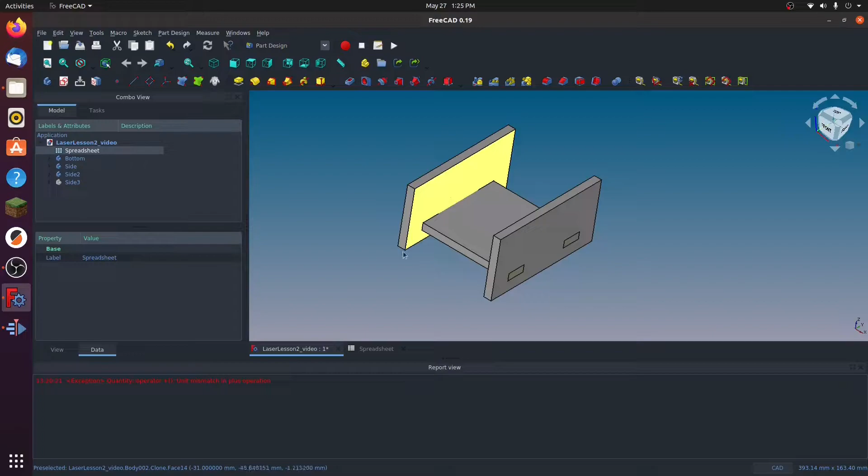I'm going to go in the opposite direction, quite thin. I'm going to be using a thin balsa because I want to cut this out on the Ortur diode-based laser, which is awesome for surface etching. It doesn't quite have the cutting power that, say, the Omni CO2 one does, but our model here isn't going to mind. Let's just make this 1.5mm. There we go. And when we come back, we can see that it is in fact working here.

Before we go too far, I want to point out this little navigation cube we've got off to the right here. We haven't been making a ton of use of that, but it's a good time to familiarize ourselves. You've probably been using control right-click to pan like this, shift right-click to rotate around like this, which is great for freehand work. But you'll notice that right up here on the navigation cube, if you click, it's going to give us a very precise view inside of our viewport. You can also click the corners, and that brings us back to our regular view. You've also got a drop down here that allows you to change between your views like orthographic, perspective, isometric, and so forth. Keep that in mind because in a moment we're going to be bouncing into another workbench.

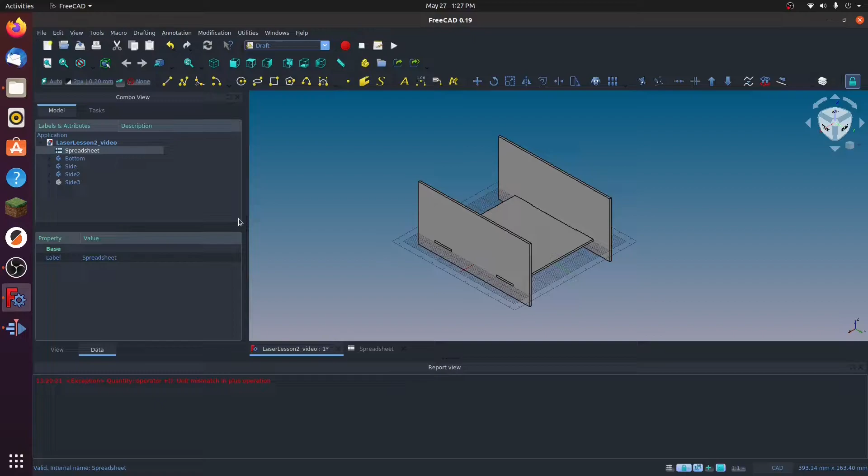We immediately see this grid on the XY plane here, and that should serve as a visual reminder of what is going to happen. The Draft Workbench is completely about working with 2D shapes. That's important because the laser is going to accept basically a 2D format. We're going to take this 3D model we've created and transform it into 2D shapes that are acceptable for use with the laser. There's a couple formats we could use: SVG is acceptable, DXF is acceptable, and you'll see as we go along that we've got quite a wide variety of options we can export to using FreeCAD.

The specific tool that we're going to be using is found under Modification, right at the bottom here, and it's called the Shape 2D View. This is the one that we are going to be using.

Now, I'm going to go ahead and use it right now, but you will see right away. I want to illustrate this because this can be very confusing when you first start working in the Draft Workbench. So I want to take my 3D model, hold Shift, and highlight all the parts that I want, and go to Modification, Shape 2D View, just like this. And a very confusing thing is going to happen.

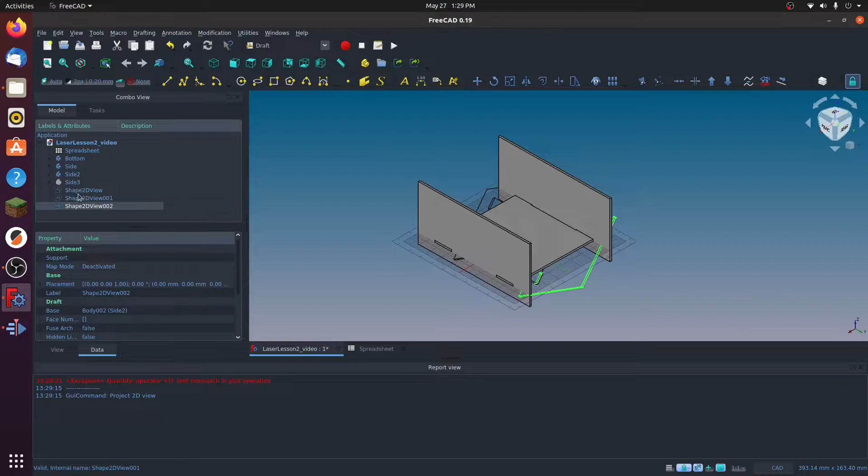You can kind of see right now that the look I've achieved is kind of strange. First off, you'll see that a Shape 2D View was created for each of the parts, and I do want that. But if I start hiding the 3D versions of these parts, you're going to see that what it's done is basically create something that would be quite unusable with the laser.

Now, the very important thing to remember about the Draft Workbench's 2D shape feature is that it will always project what is in the viewport to the XY plane. So you have to make sure that you position your model in a way that you will get the projection that you want for producing your vector.

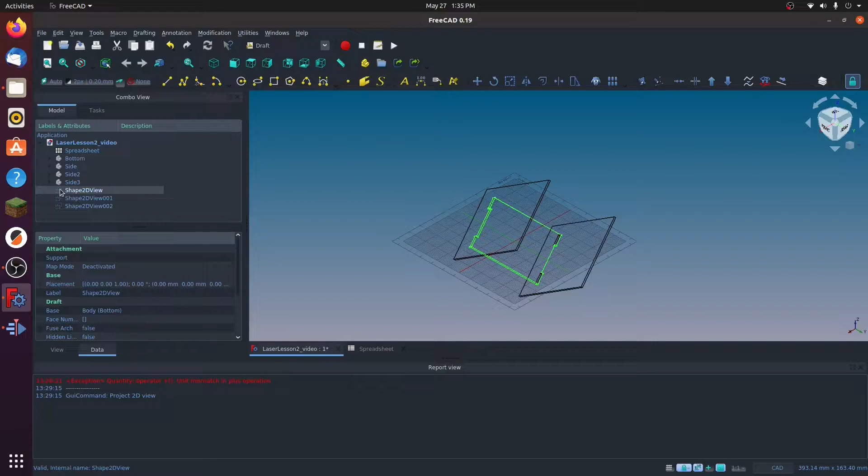Let's fix this up. We're going to make use of that viewport navigation cube, that's going to be quite handy now. So first thing I would like to do is let's get rid of this vector view that we don't want. So we're just going to delete that.

We're going to bring back the visibility of our 3 parts, and let's say this time we go one by one. So I've got the bottom part highlighted right here. And in order to project the vector that I want onto the XY plane, which view should I be looking at? Now, I could try and get it just by panning and possibly rotating around, but no matter how careful I am, I'm never going to get it just right.

So instead, we'll use our navigation cube. I'm going to click on the top, which gives us this kind of bird's eye view of the bottom piece of my assembly. If you want to confirm that for yourself, you can actually hide the 2 pieces that we're not working with right now, and re-highlight the bottom.

We'll go back to Modification, and now when we click the Shape 2D View, it'll look like not much has happened, but you can actually see there's a kind of a dark edge around here. And if we hide the bottom piece, there is an exact 2D duplicate of our 3D part.

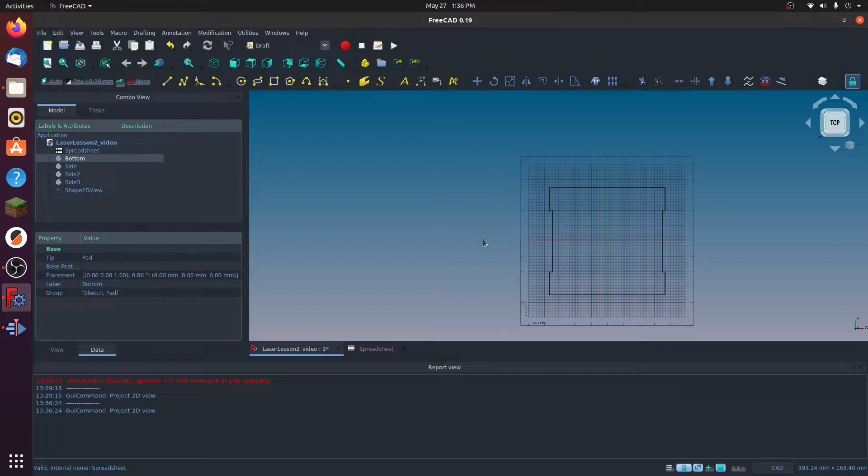It's pretty good, right? Now you can still use all of your usual navigation stuff, so I can still rotate around like this, and I can rename the Shape 2D View. Let's do that, because if you're working with quite a few parts, it could get confusing. I'll rename it, and I'm going to call it Bottom Shape 2D. There we go.

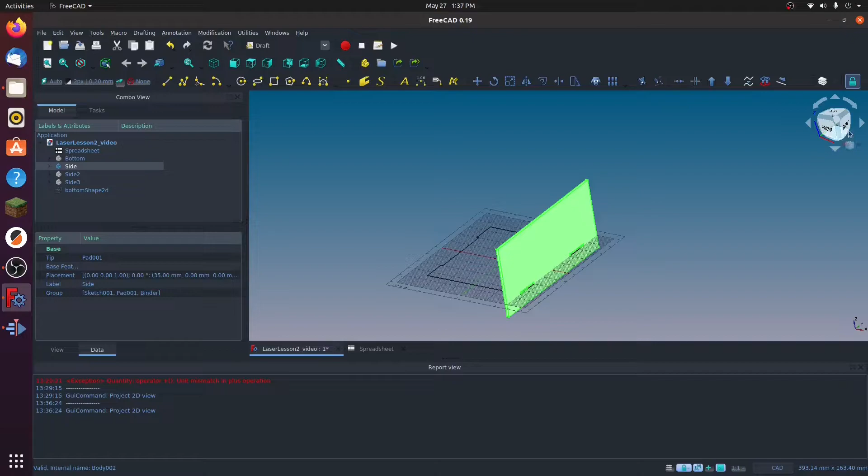And let's do another one. Let's bring back one of our sides here. There it is. And now you can imagine that if you click on the right-hand view, once again, we're going to be perfectly aligned to get the vector that we need. The bottom piece is maybe the simplest one because we're just projecting it onto the XY plane and it's already on the XY plane.

The important thing to notice here is that we're going to project this onto the XY plane, and it's basically going to rotate it 90 degrees. Let's do it. We're going to go Modification, Shape 2D View. And now let's hide that side piece, and it looks like it's disappeared, right?

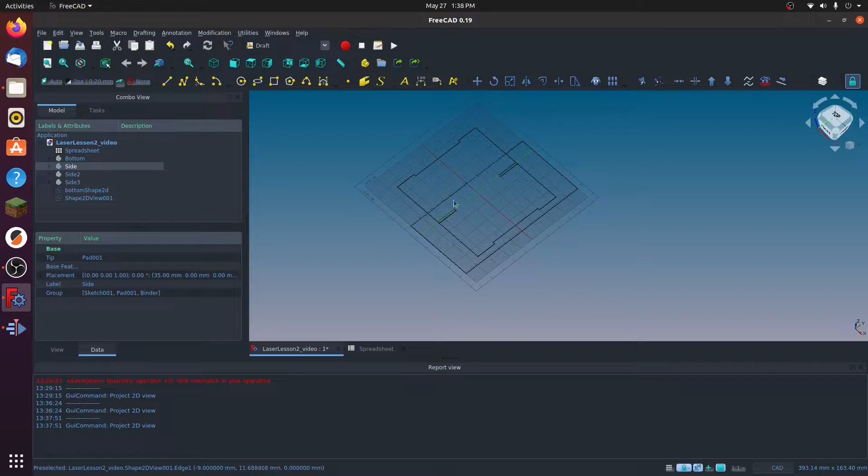But if we go back to our view from above, you can see that our side piece is in fact there. Now, it's projected it onto the XY plane and it's overlapping our other piece. But if you highlight them one by one, you can see that they are in fact 2 completely separate vectors.

If you find this view a bit odd, having them overlapping doesn't really affect our final output, because we're going to export these shapes into another format for use in our laser software.

But if you find it confusing to look at like this, there's nothing stopping you from highlighting one of them. I'm going to rename it first of all. So I'll call this my side shape 2D. There's nothing stopping me from taking my side here, going down to the placement property, looking for the position, and we can move it.

And once again, you can see our little navigation cube becomes helpful because we can see that the X direction is basically how we are aligned here. It also matches the red line that we see in the middle of the grid. And if we start increasing the X direction, we can move that on over. As I say, we don't have to, but visually it can be helpful working this way. All right, so that looks pretty good.

And if we bring back our 3D model real quick here, we can see that we don't necessarily have to convert our other side into a shape 2D view, simply because it's the exact same as the one that we've created. So if we want to save ourselves a little step, we can just export directly the two pieces that we have here and then duplicate it in the laser software that we're going to be using.

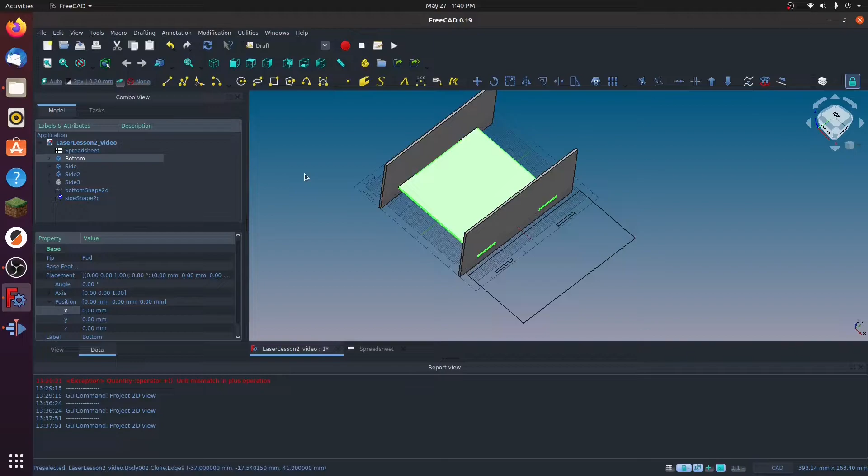So let's do that. I'm going to re-hide these. There we go. It's important that you highlight by holding Shift all the pieces that you want to export. And then you can simply go to File, Export, and you're going to have a ton of options inside of here. If you click the files of type, you can see I've already selected DXF, which is a very simple 2D format. But if you click that drop down, there are tons of options here.

I'm using the Autodesk DXF 2D, but you could also, for example, use an SVG type of format. But let's go with the DXF. It's a very universal format. I think that's okay. And I'm going to give it the name that I want. I'm going to call this my tab slot assembly, just like this. And I'll save it into my documents, just like that.

And that's all we need to do. We'll have perfect vectors of our model, and we'll be able to bring them into other software, principally the laser control software. Okay, we're now moving over into the laser control software. Here in the TTL Makerspace, we make a lot of use of a tool called Lightburn because it can be used for controlling lasers from this Ortur Laser Master that we're looking at here, all the way up to the more powerful Omni CO2 based laser.

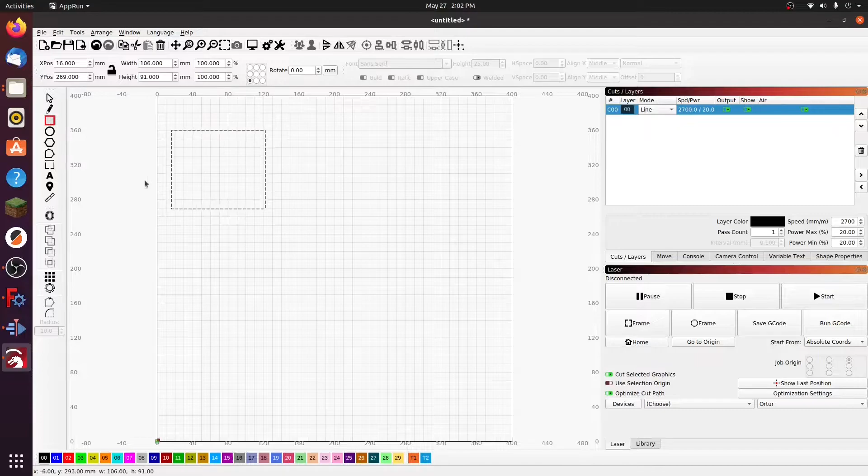Just to illustrate really quickly, I can draw a shape here, then I can select that shape, I can move it, I can scale it, and so forth. We won't be making use of the drawing tools in this video because we've created our design using FreeCAD. But I just wanted to point out that when I draw this shape, it is automatically informing the laser control software that we find over to the right here, where we see cuts and layers.

Along the bottom of these tabs, you can see that I have options for moving, and this is actually for moving the laser head. I've got a console, and I can type in commands and send them directly, manually, to the laser from here. I can even create macros of commands to do sequences of things with the laser, such as moving it, and then maybe starting up its pilot to show where the laser head is positioned, things like that.

There's a camera control tab, which has to do with if you have a camera attached to your laser. That's a fun thing we could look at. Variable text has to do with if you want to, let's say, output a series of serial numbers.

You're doing, like, product marking or something like that, and you want the SKU numbers to be incremented and output automatically. Variable text lets you do things like that if you need to make, say, 1,000 SKU numbers. This is all part of laser control. We're primarily going to be looking at the cuts and layers options down here.

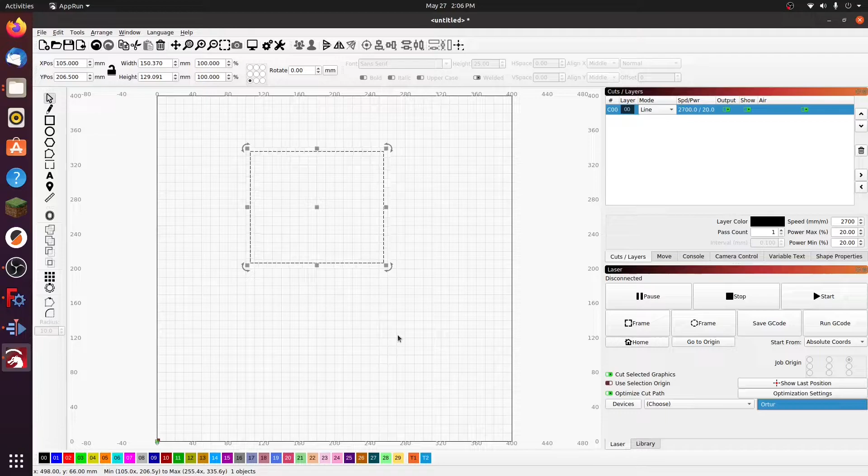You would also see this little point right here, which is the home location. On the Ortur Laser Master it is in the bottom left, but on the Omni it would be in the top right, and it will remember things like that, and basically lay out the bed for us with dimensions specific to the laser that we want to work on. Now, this is a very quick overview because this is not an in-depth tutorial on using Lightburn, but we can definitely do more videos on that.

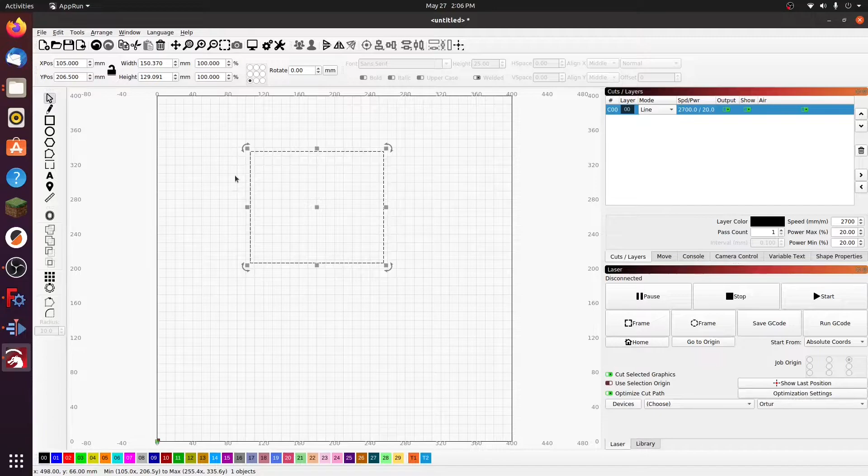For now, what I want to show you is how we bring our design that we created in Freecad and output as a DXF into Lightburn and lay it out for creating on the laser. So first off, let me get rid of this little square that I've created. And I'm going to go up to File. I am going to say Import. I'll go to my Documents. And I need to bring in the file that I created, which is the tab slot assembly DXF.

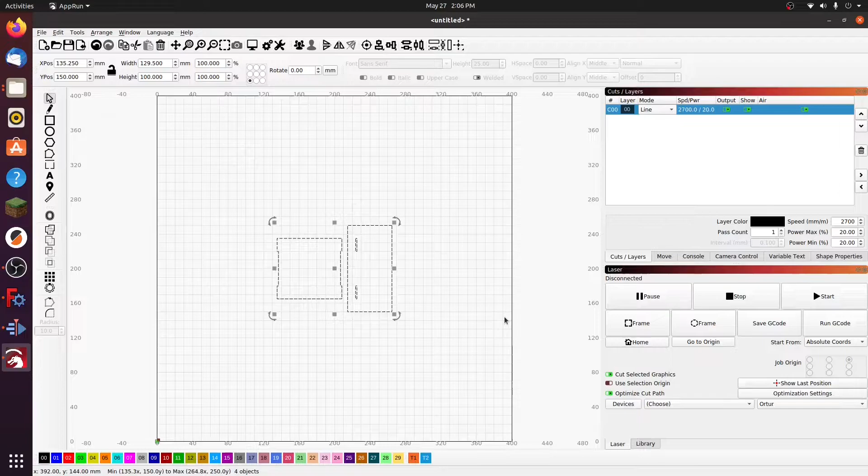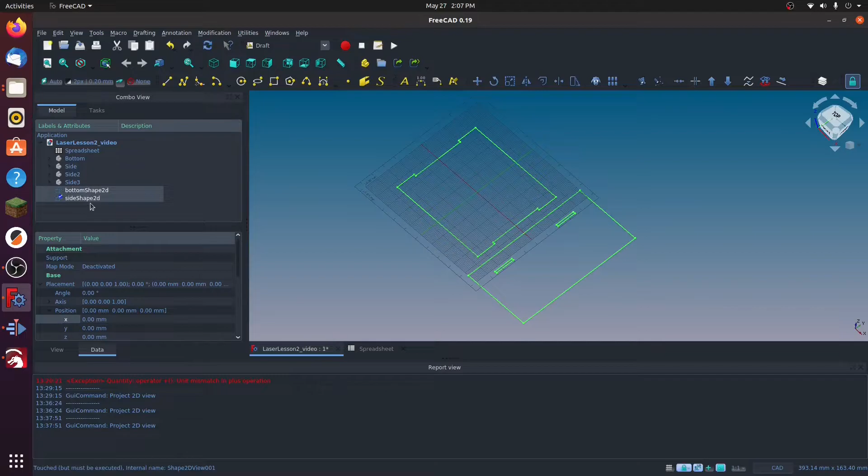I will open that up and just look at that, guys. Perfect duplicates of the design that we made in Freecad. And I'm going to go ahead and bring them on down here to be close to the home position. And a really important thing to notice about this DXF that we've created is that these are separate, right? I can grab them individually and move them. And that's important. The reason why I'm able to do that is because back in Freecad, if you remember, these Shape 2D were unique objects, and they remain unique objects when they come in as vectors into Lightburn here.

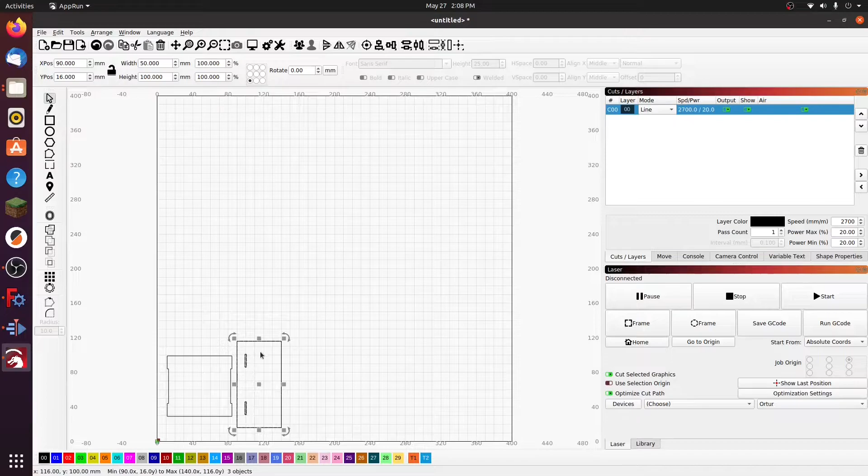And if you'll recall, we said, well, we don't really need to make a second side because we can do that in our laser control software. And this is one of the advantages of having the design software and the laser control software combined in one, the way that we do in Lightburn. I can grab this shape right here. And if you go to edit, you can see that Control D gives us an option to duplicate. And it's going to place the duplicate exactly on the shape that we have just created it from. So you'll just want to grab it and move it out of the way.

Now, as we've been working here, you would notice that in the cuts and layers box over here, it has automatically put one line that has a few properties. It has a mode, which it has set to line. It's got a speed power setting and a toggle that allows us to either output or, if disabled, not output this. Now, where is it outputting it to? Well, it's going to output it to the laser.

And the mode that it is automatically selecting for us here is set to line, because line is the setting for cutting out a shape. And looking at our design, the software has guessed basically that these are shapes we want to cut out, probably because they are fairly simple outlines.

But there are other things we could do. If we wished, we could change it to a fill. And a fill is for doing a surface treatment. So instead of cutting out the shape, it would be basically burning it onto the surface of the material. A good example would be if for some reason we wanted to put these on leather and, you know, create nice geometric shapes on top of a nice piece of leather. A fill would allow us to do that.

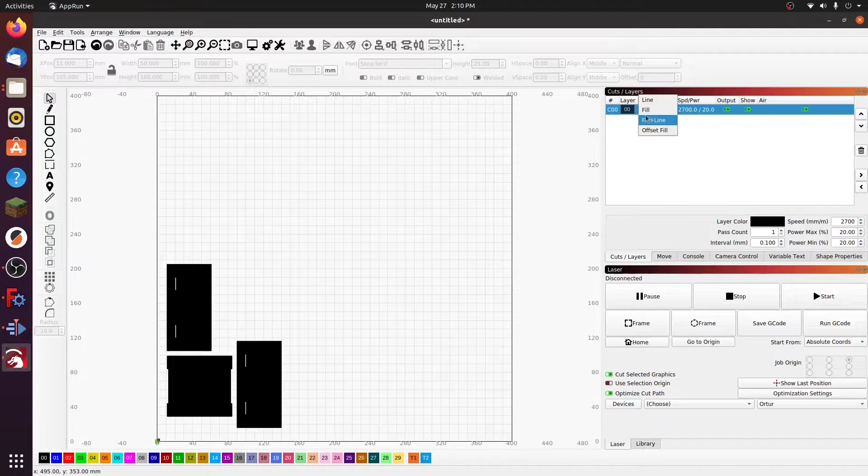You've also got a sort of a mix of these things with fill and line. Offset fill we won't get into too much in this video. In fact, we aren't going to really be making use of fills at all in this one. So let's go back to our cutting option here. But if for some chance we did want to treat one of these shapes differently, there's a way that we can do it. And this brings our attention to the multiple colored boxes down here at the bottom.

You see, lasers use a color coding system to determine what to do with a vector line. So let me illustrate that. Let's say I select this particular side and I change its color, which is currently set to, as you can see, 0, 0. 0, 0 matches up with black. This is important. A lot of people have difficulty distinguishing certain colors, so keep an eye on the numbers that are matched with the color. But I'm going to change it to this vibrant blue here.

And as soon as I do, you'll notice that there's now another layer. And the software has guessed, oh, maybe for this other cut that I'm doing, I want to do a lighter cut. And so it has increased the speed that the laser head will be moving at, and has kept the power the same. Now we can edit that all we want. I could say, oh, you know what, that's way too fast. I'm going to bring this down to like a 5,000, for example. And so this is how we are able to do different things at one time.

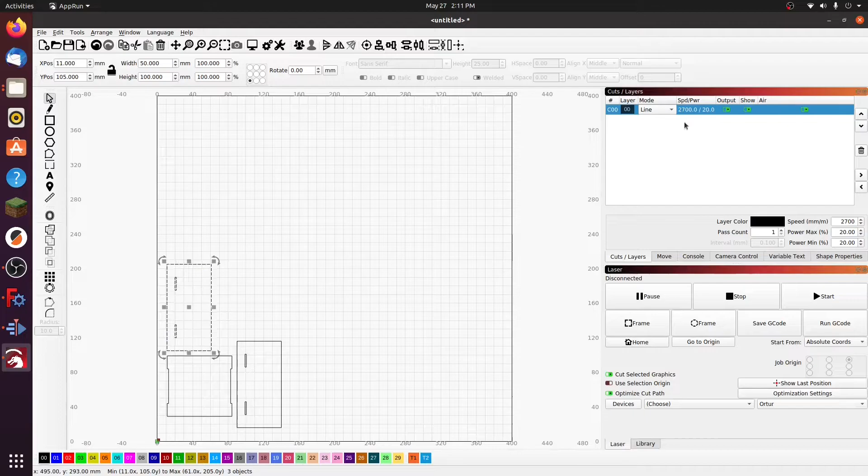If I switch this back to black, you can see that this second layer that was created is automatically deleted, because now everything is black and they all have the same speed and power settings. You know what this means? This means this is basically ready for outputting to the laser. LightBurn does an outstanding job of transforming the vector shapes that we've provided it into the G-code that's needed by the laser that we're connected to. So let's go into the software and learn a little bit about setting the speed and power settings we need to get clean cuts.

Getting clean cuts on a laser is probably one of the more simple operations to start out with. This isn't to say there isn't a little bit of learning to do. But it is simpler than if you are trying to do surface treatments on a material. If you're doing something like engraving or etching, that's a little more difficult. In the case of a cut, we basically just need to have this laser burn its way through the material. And to do that, the two most important factors are the speed and the power. Now, coincidentally, on the right-hand side here of the software where we control our laser, you can see that the speed and power are grouped together.

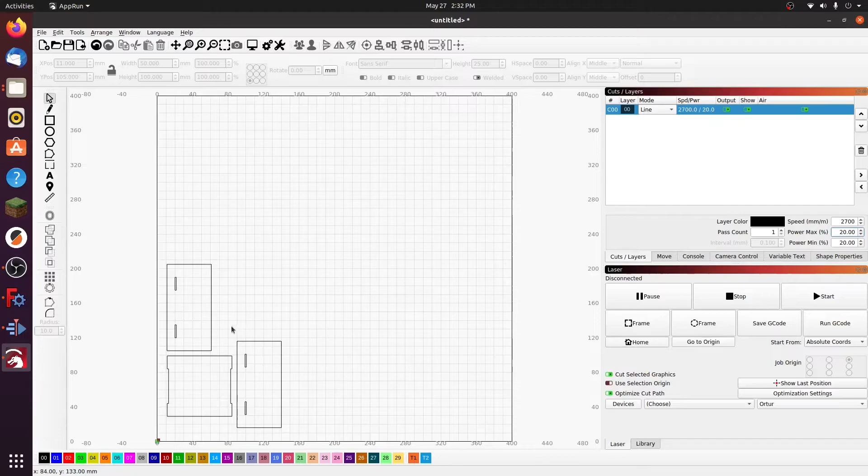The speed is how fast the laser head is going to move over our material. That's going to be controlled by the stepper motors. The power is how strong of an output the laser is going to use when it is firing. So our laser is basically going to be using our vectors here to determine the path. And so the speed that we set will basically be the speed at which it traces these outlines. And the power will be how much intensity the laser is going to focus at.

We are working with an Ortur, as we can see down here in the selections. That's the only one available to us. And the Ortur is a diode-based laser, which would have a good deal less total output in terms of wattage compared to even a mid or lower power CO2-based laser. But that doesn't mean it isn't quite capable. Remember, we're only going through 1.5 millimeter balsa in this case.

So what I would do is I would go in and I would set the speed that I want to use. I'm going to set it to 3000 right here. And I'm going to set my power up to 82. Now, how did I get these? Well, basically, I got these settings by simply running tests.

And this is a very important thing I want to point out, is that you will not be able to find any kind of magical, universally applied settings for working with a laser. You can find some sites where you can sort of get a starting point for settings, but there are so many factors involved, and some of them simply cannot be fully accounted for.

For example, the age of your laser, like how much the diode or the CO2 tube has been used. Over time, they degrade, and so you may find that over time, what worked well as 80, you might have to now bump it up to like 82, for example. Also, the materials you're working with.

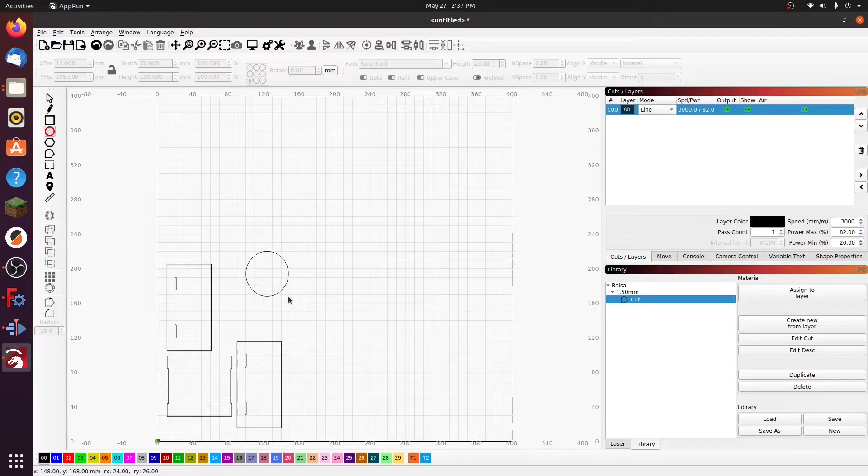So let's say I had another shape on here. I'll just quickly give myself a circle. And I'm going to color code it so that it's on its own layer here. And let's say I want to cut this out from balsa. I can simply say assign to layer. And you see how it automatically adjusts the speed and power so that I don't have to remember every single setting that I used that was successful.

And over time, you could build up a whole set of materials here. You could be working with balsa, different thicknesses of acrylic, etc. And it's really nice that over time you can build up a library that works well with your particular brand of machine and with the materials that you commonly have access to. So I really wanted to pass along that tip because I notice a lot of people marking this stuff down in a notebook and so forth, and that'll work, but it's also kind of error prone.

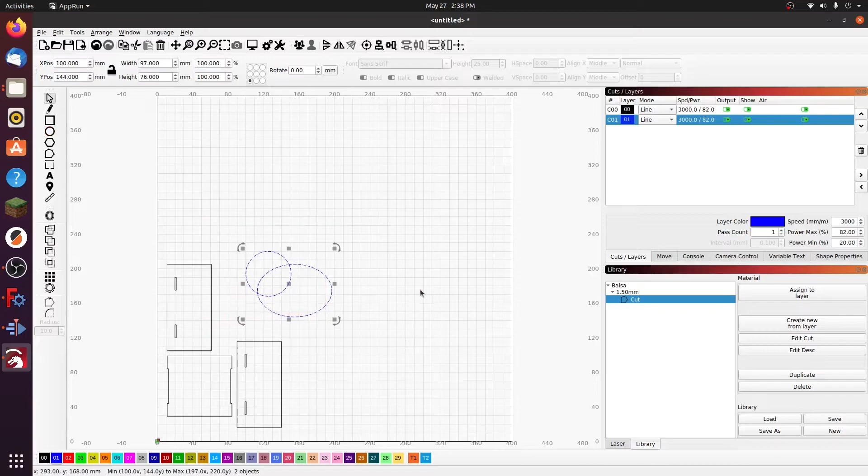All right, let's eliminate this. I don't really need these circles cut here, so I'm just gonna delete them out of here. I'll go back to my laser control tab right here, and we're prepared to send this to the Ortur with a speed of 3000 and a power of 82. The last thing that I'll point out is this option right here where you see pass count.

In a lot of cases, especially with the diode-based laser that has less power, a single pass is not going to cut it, even if you had the power set to the maximum and you brought the speed down quite a bit. First of all, I'll mention that you probably don't want to do that because if the head is moving very slowly and the power is at maximum, there's a good chance you're going to start a fire. The Ortur has a built-in smoke detector that will cut the machine off, and you'll have to do a reset if you're in danger of starting a fire.

So generally, you want to keep the speed at something reasonable and the power away from the maximum. So instead of bumping up the power or bringing down the speed too much, what you can do is set it to do 2 passes. So it will actually repeat the cutting operation a second time, or even a third time or more if you wish.

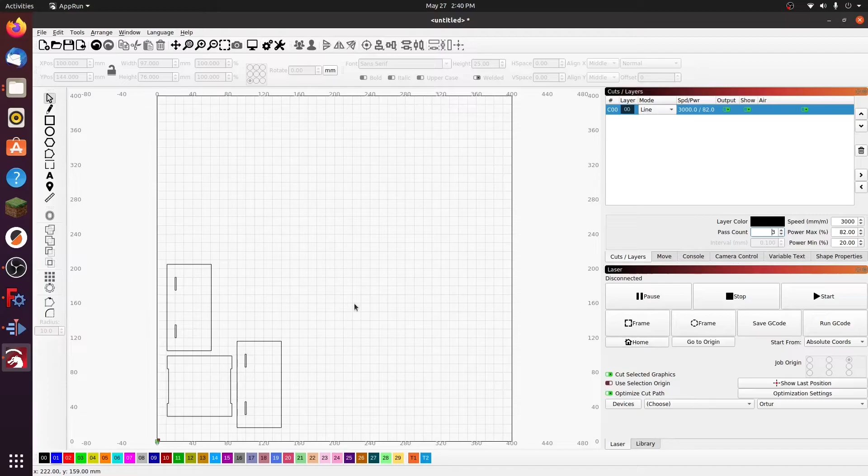Now, it's worth pointing out that you can't just keep doing as many passes as you wish and cut through material. There is a point of diminishing returns simply because of the focal distance of the laser; there's a maximum focal distance. And once you've cut down to that maximum focal distance, additional passes really aren't going to do anything other than charring the edges of your material or creating nasty melting around the edges of your material.

So I'm going to cap this at 3, and I think we are ready to hit the start and send it off to the laser. And that's all there is to it. Let's send this to the laser and watch it make our parts. Now you're going to want to put on your funky laser glasses for this next bit. Safety first.

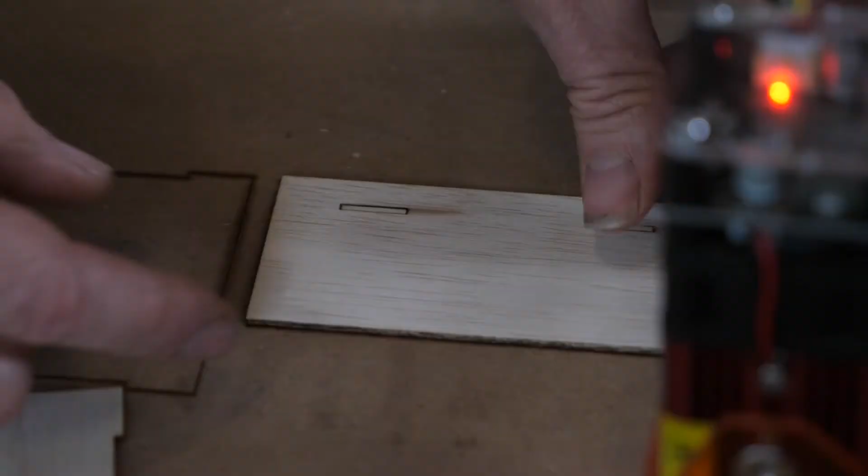Now, if you make it all the way to actually producing your parts and you find that they still fit a bit tightly, there can be a few reasons for this. For example, if you're working with acrylic, the laser could actually create a little bit of melting where it's doing the cuts, and this can cause the fit to be too tight. If you find that this is consistently the case, there is something that you can do. We'll create something called an offset factor back in FreeCAD that you can use to adjust the tolerance of your model. Let me show you how we do that.

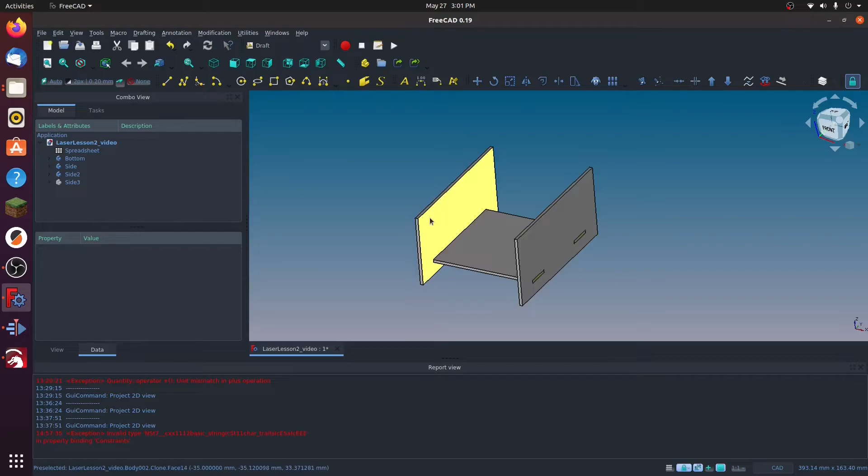Okay, you've got the nightmare scenario here. You followed all the steps, you're super careful, and you find that after you produce your parts, your tabs and slots are still too tight a fit. And you don't know what to do about it. Well, the good news is there are things that you can do, and I'm going to show you one technique. We're going to create an offset factor, and even with this, we will benefit a lot from parametric modeling, as you will see. And we're only going to have to do it in one place because, as you remember, our other side here is a clone of the first side.

So to get started, let's go back into our spreadsheet, and we're going to add in one more alias here, which I will simply call offset factor. Okay. Now I'm going to start off with an offset that would be much larger than we would ever use, but I'm just doing that because it'll make it a little bit easier to work with, and we'll be able to see what we're doing on our screen a little bit better. So I'm going to set this to 2 millimeters.

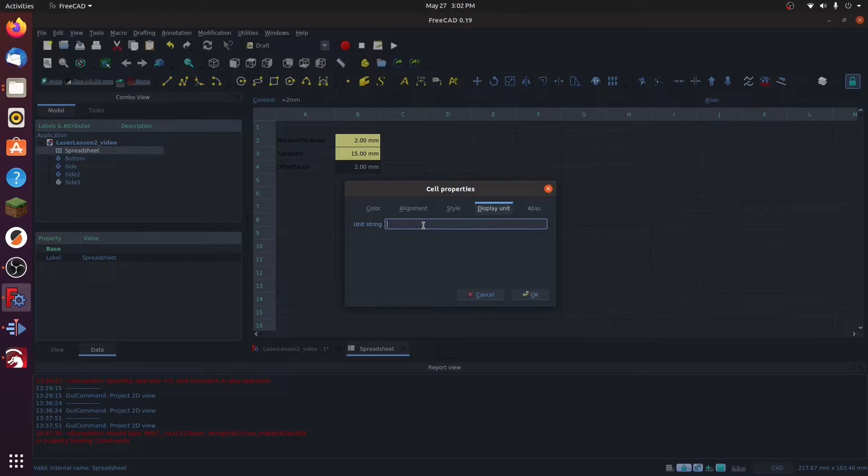And like before, we're going to go into the properties so that we can assign it an alias, which will be the offset factor, just like we did before. So that's offset factor, and the display unit is going to be millimeters. Click OK. All right, let's see where we can make use of this. So the area we're concerned with here is in our side. We want to apply the offset factor to our slots that we've created.

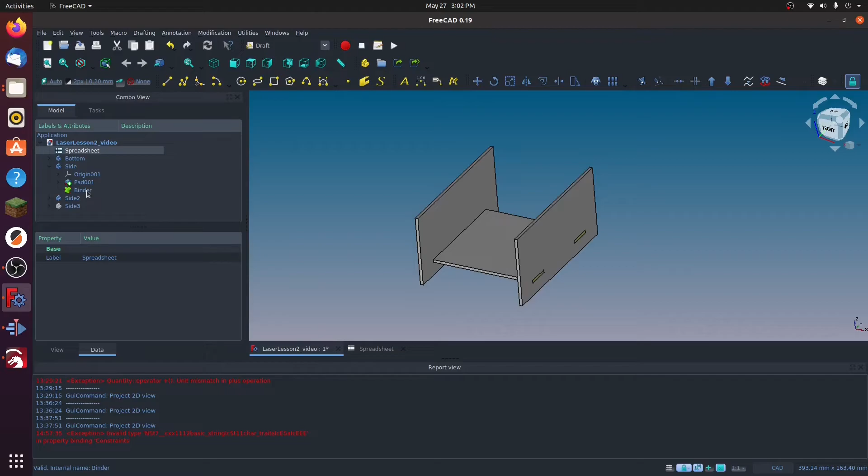So if we open up the side, we can see that we still have the shape binder available to work with. So let's open up the padding here, and we're going to go into our sketch. Let's zoom in a little bit, and let's work with one of our slots first of all here.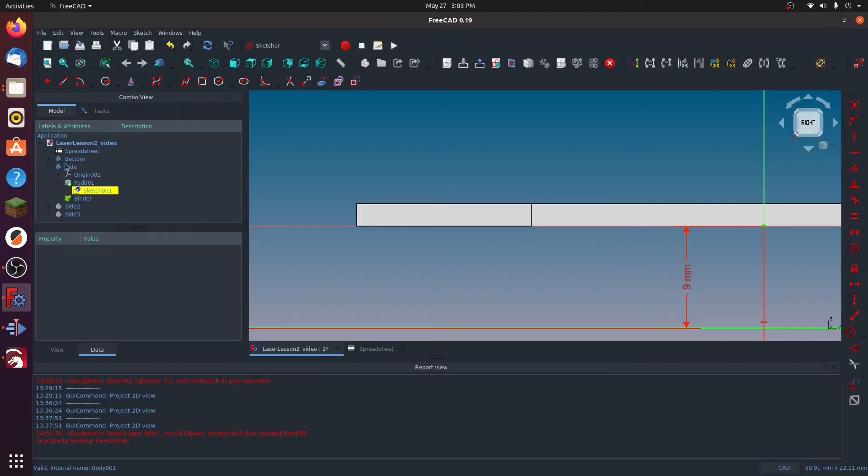So I think the easiest way to illustrate this is to highlight this entire slot and delete it so we can see how to apply an offset. To work with the offset, we're going to create our external geometry to the shape binder, just like we did before. But remember, in order to apply external geometry to the shape binder, we have to hide this solid model in the background, or FreeCAD will get confused about what we're trying to select. That piece in the background is the bottom, so I'll click on it once, hit the space bar to hide it, and now our shape binder becomes visible and selectable.

So we'll take our external geometry tool, zoom in a little bit, and start selecting the corners. Here's one, let's grab another one here, might as well grab these. There we are. So now we are once again ready to apply our box.

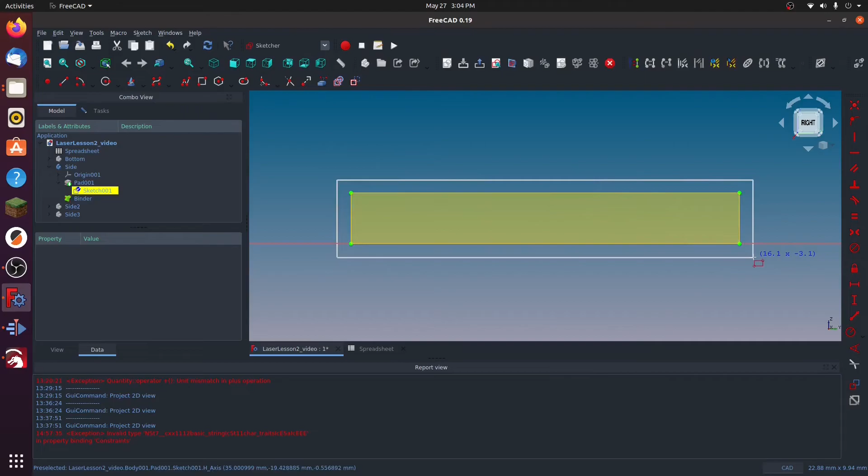We'll click on that shape tool and draw it around like this. Maybe now you're starting to guess how we're going to apply this offset. I'm going to click on this corner and this corner of the shape binder, use my constraint here, and we're going to go to the spreadsheet, bring up our offset factor, just like that, hit OK, and it turns orange because we're using a formula.

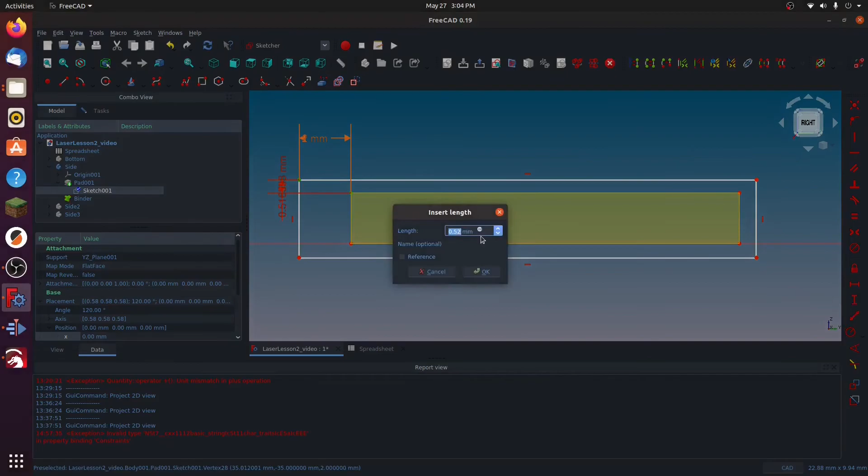We do the same thing for the vertical. Go into our formulas, go to the spreadsheet, get the offset factor, hit OK. And so now we've got a consistent offset factor, and because it's an alias in the spreadsheet, we'll be able to edit this. Obviously, we're not going to have a 2mm offset at play here—we'd need significantly thick material for that to make a difference. But it does make it a little easier for us to work here.

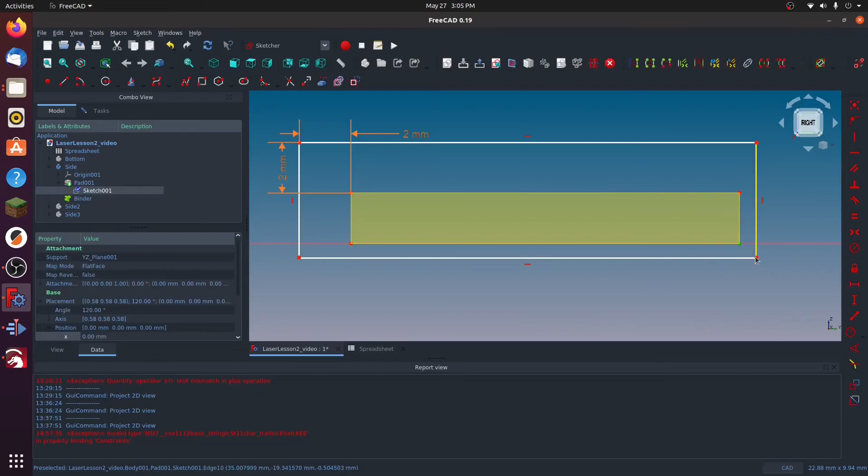Let's do the same thing in the other corner. No big mystery here—we're just going to go to the spreadsheet, go to the offset factor, apply it, hit OK, pull this out of the way. Same thing for the vertical.

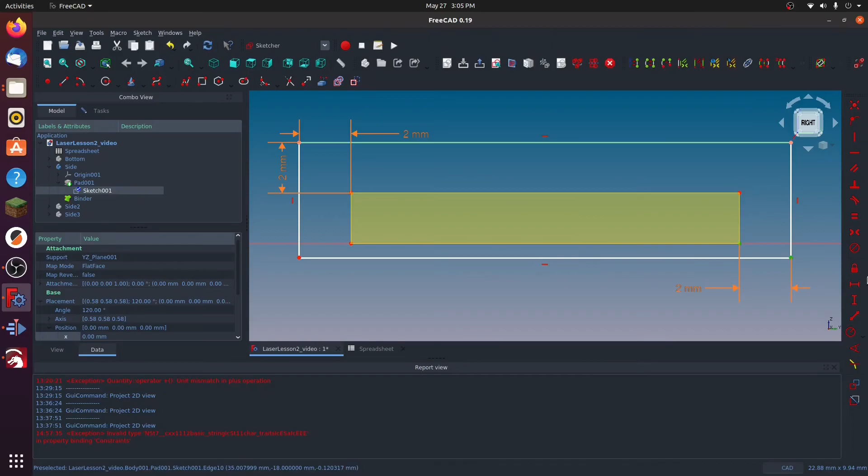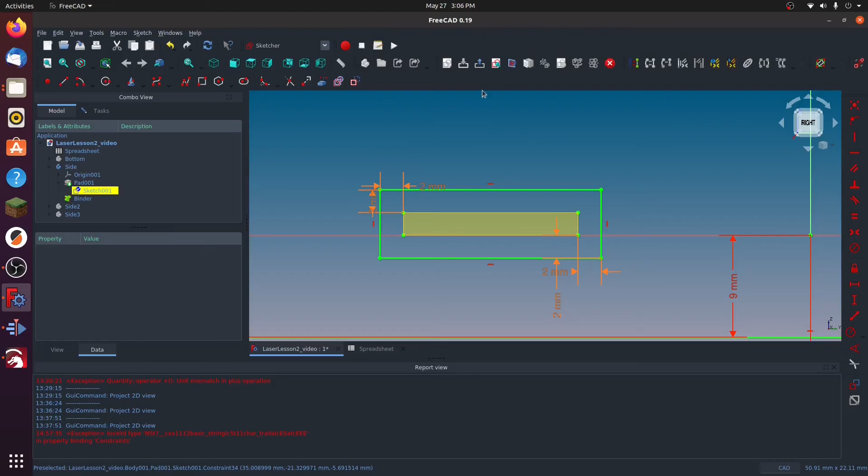You can see it's already wanting to turn fully constrained, that's because our shape binder is fully constrained. Hit OK, and that's pretty much all there is to it. It's a simple trick, but a good one. If we close out the sketch, you'll see we now have two differently shaped slots, but this is going to let us illustrate what we're doing here.

If we go back to the spreadsheet, let's bring this down to a more reasonable 1mm—even that's big. Going back to our model, you can see it's a much smaller offset factor around our shape binder, and it's also reflected in the clone we created over here. So that's looking pretty good.

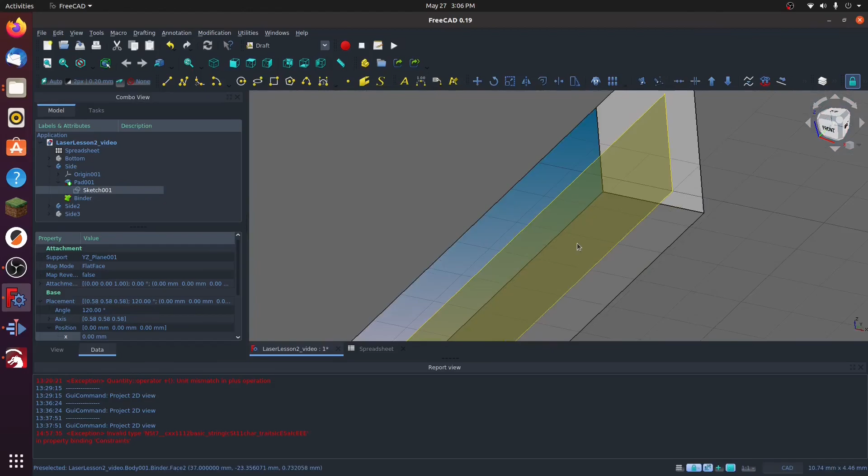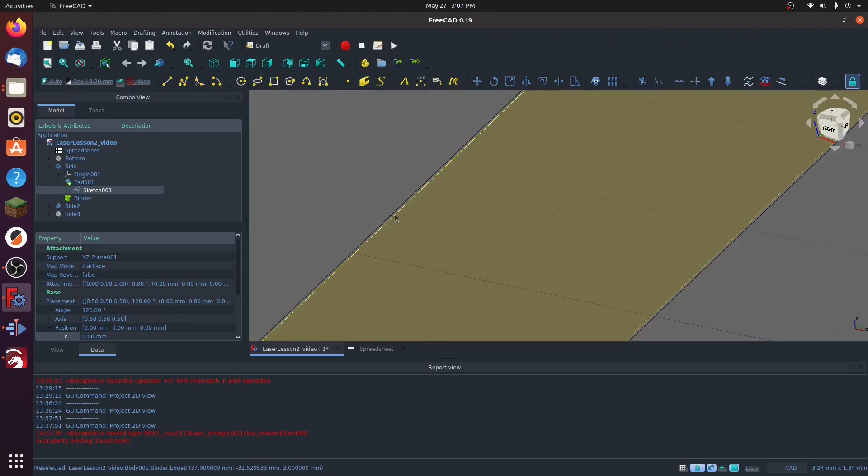In reality, what you'd probably want to do is dial this down to a very small offset, like 0.02mm. It looks the same, but if we zoom in quite a bit, you can see we still have a tiny amount of offset between the two. Now you might have to output it to the laser a couple of times to know you're getting your proper fit, but this is basically how you can create an offset factor and still keep everything parametric, with your model fully recomputing when you change that value.

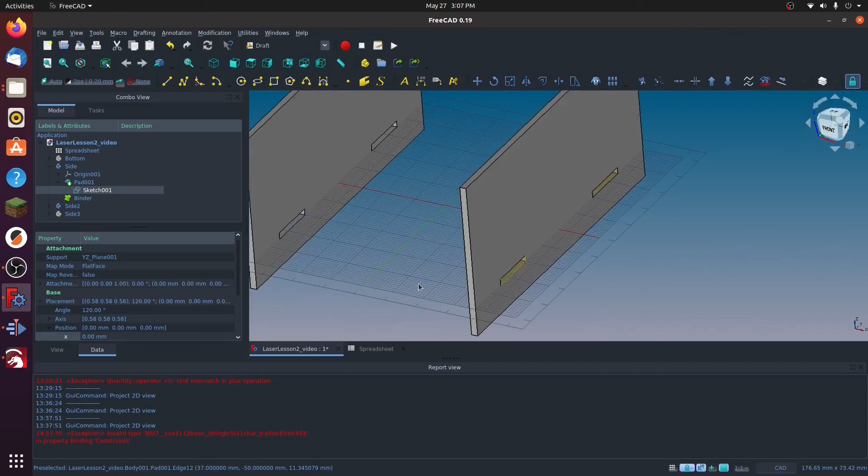You can also do things like a scale factor—there's all kinds of cool options you can do using this technique.